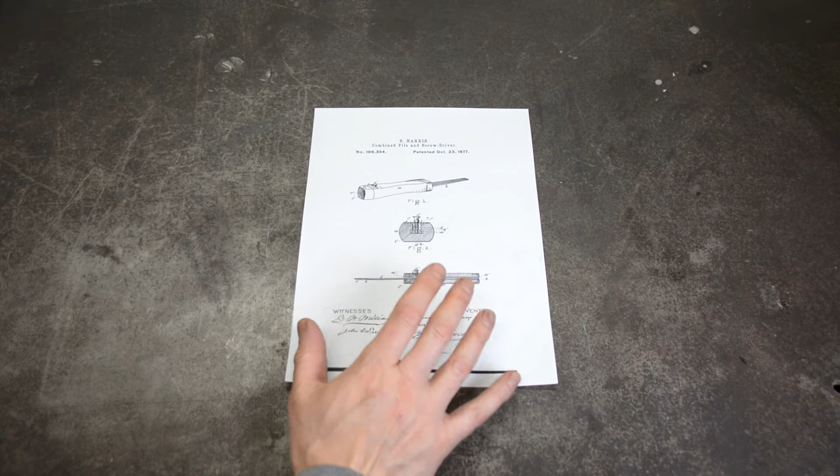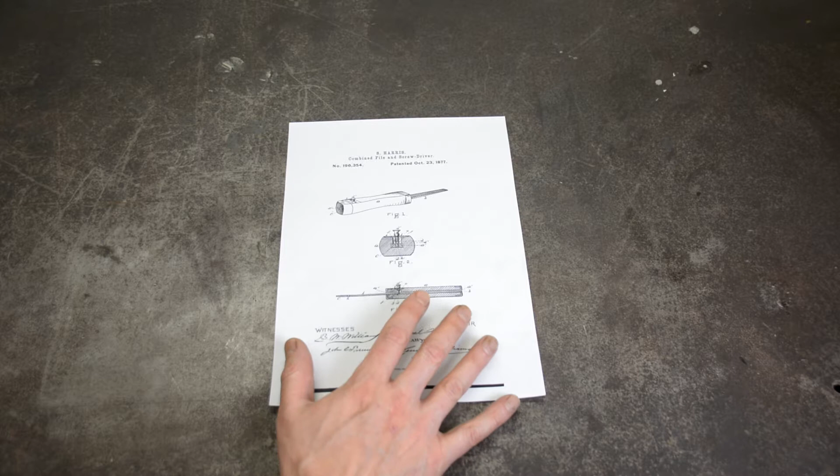Welcome. Here today we have a fabulous multi-tool, patented way back in late 1877 by one Samuel Harris of Boston. The patent, both in the technical drawings and the description, describes a combination file and flathead screwdriver for all of those occasions when you need both of those tools.

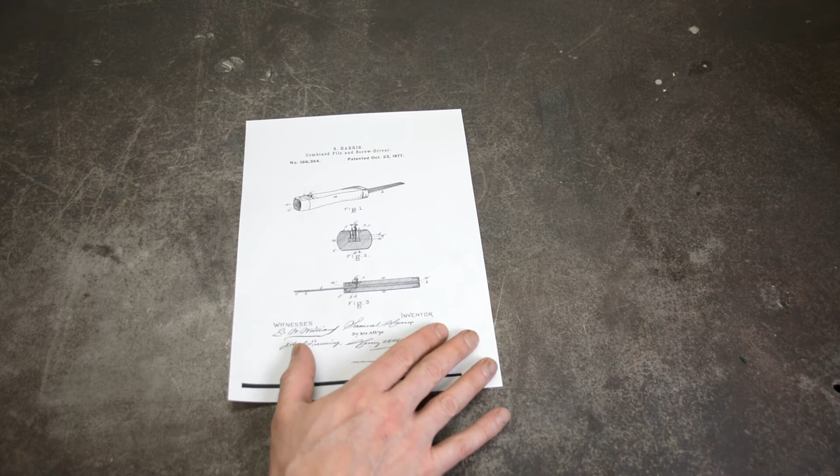Just an incredible example of ingenuity from nearly 150 years ago. I mean, you could only hope to find something like this these days on the Home Shopping Network or something like that. And shockingly, there is no record of this design going into production. Sure, it's a timing thing. It's just too ahead of its time. I'm sure Harbor Freight or something are ready to drop a knockoff of this thing any day now.

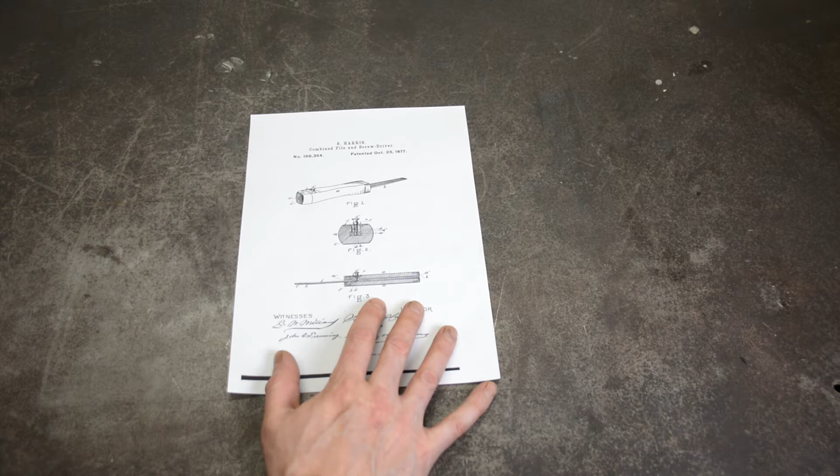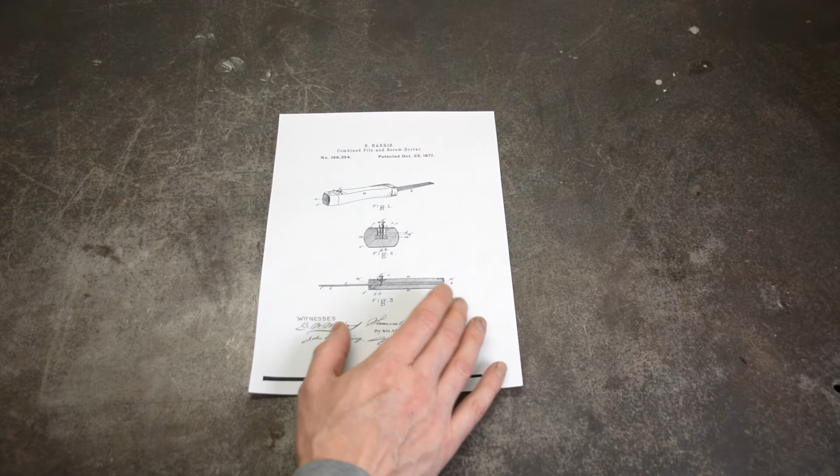In Figure 1 here, we can see the file in position. Figure 2, a locking mechanism, nice and spring-loaded there. And of course, down here we can see the tool runs the entire length of the handle. I really love these multi-tools. You just can't get enough of them. I mean, who could be expected to carry both a file and a screwdriver? So, without further ado, let's see if I can make it.

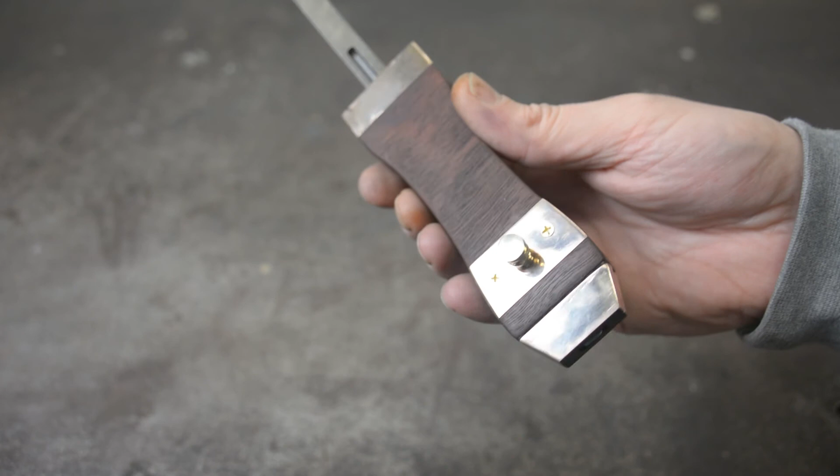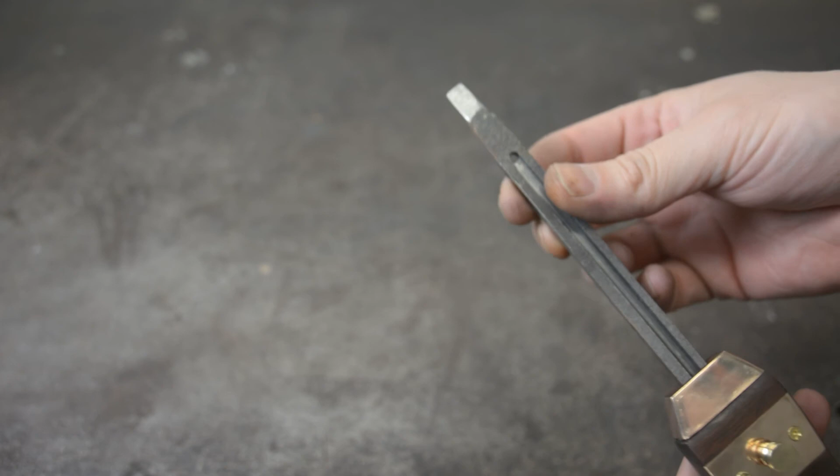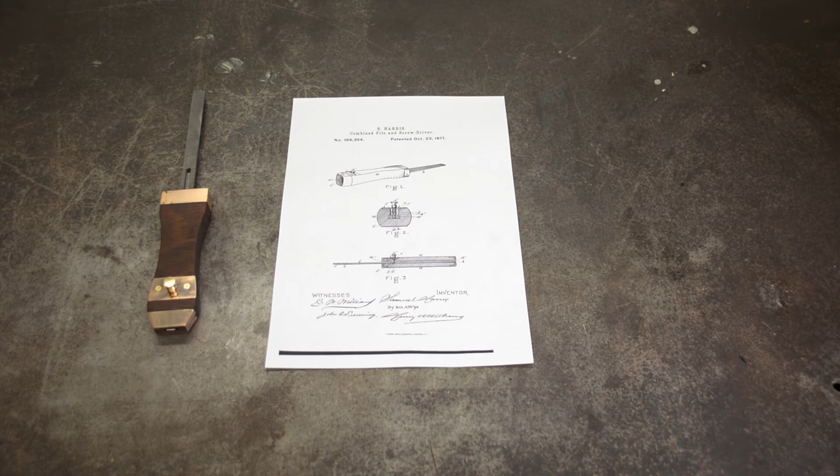Well, that was fun. So what did we learn? Other than I'm not very good at working with copper. Sanded through a few spots here and there. Why might this tool not have seen any kind of production outside the design stage? Well, for one, there's some fairly costly elements to this tool.

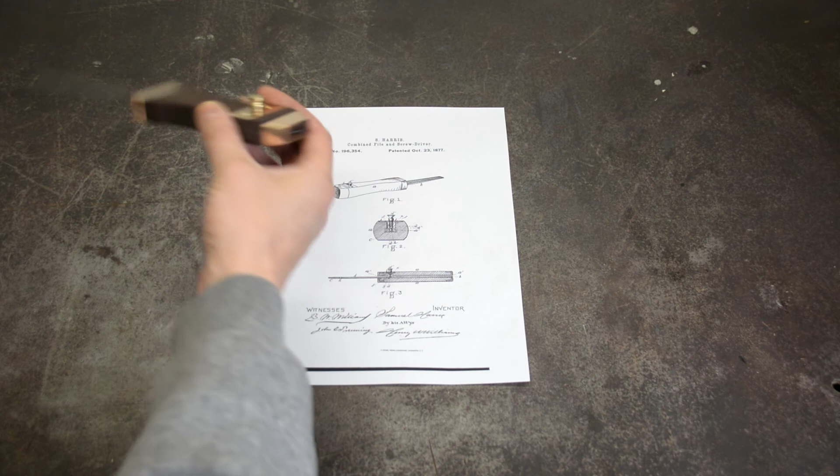The main channel through the handle here. The way I did it, splitting the wood, routing the channel and gluing it back together, not necessarily the best course of action, particularly for a tool that's going to be used in any kind of twisting fashion, like with the screwdriver. For a production tool, you'd probably want to be drilling that out, doing some kind of broaching, a whole bunch of custom jigging, I'd imagine.

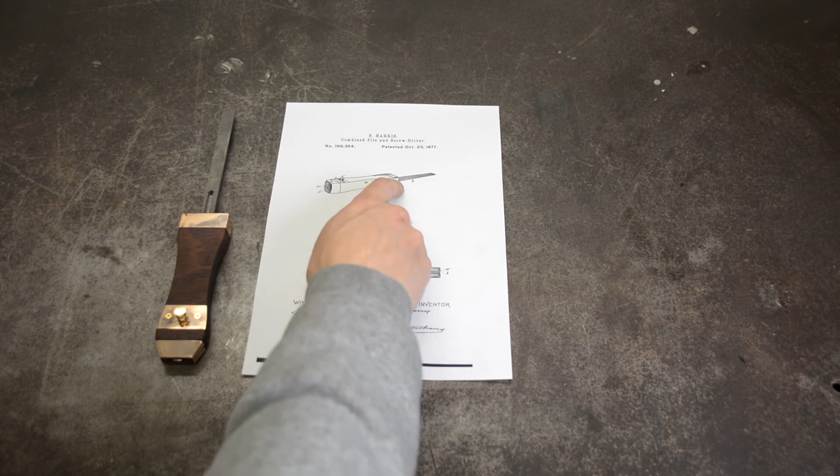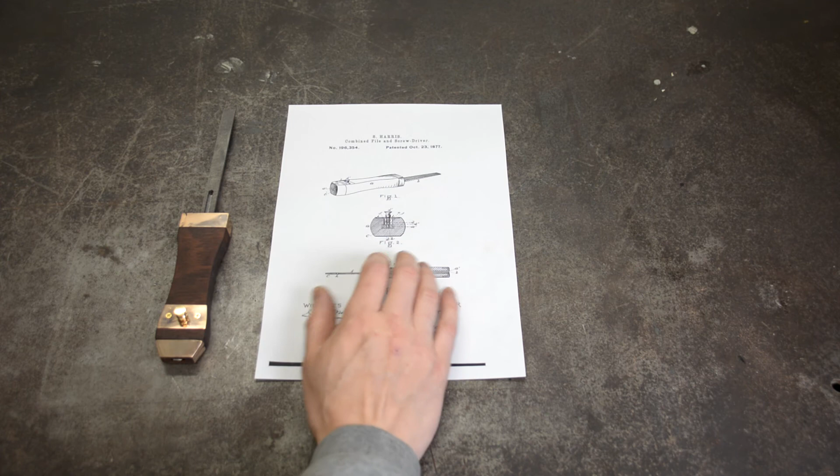The ferrules on each end being weird shapes, that's not great. Particularly this guy on the end with all the curves, the flats, the angles. You're probably going to be looking at a bunch of stamping to produce those, maybe even progressive stamping to get the depth. Again, just adding to the cost of this thing.

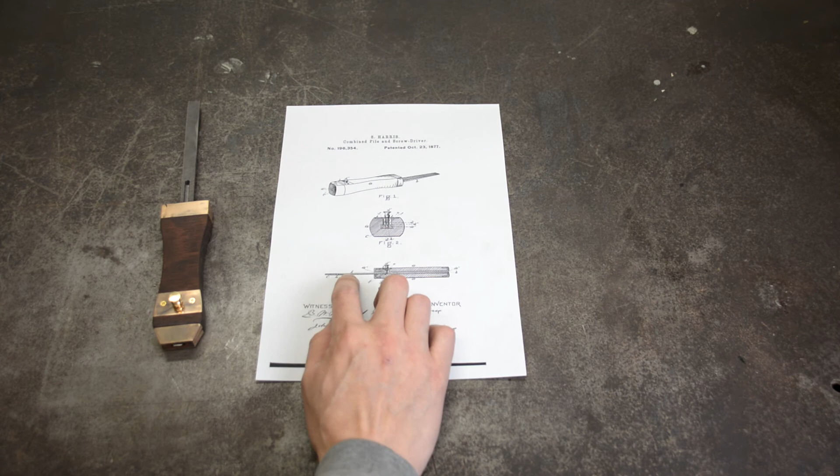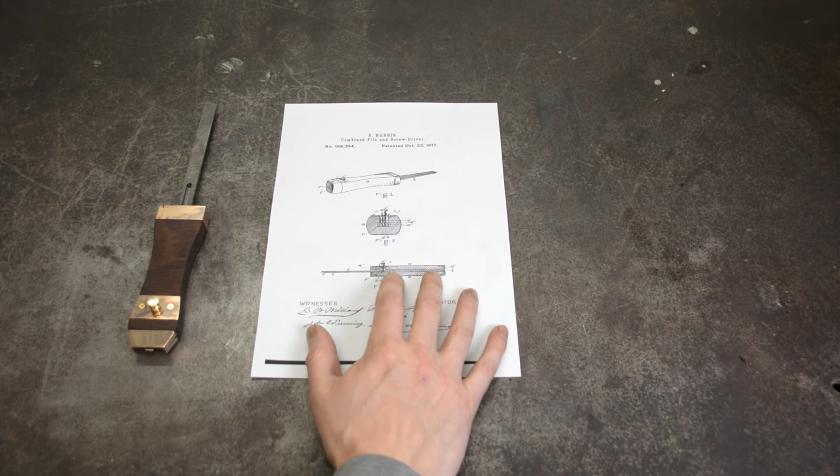As you can see, I did a slightly different design so I could fold it, or at least attempt to fold it. The channel that's in the tool itself is actually described in the patent. Now that's a great bit of design. What that does is that the pin never leaves the channel. It's a retention mechanism. So it means that when you lift the pin and slide the handle, even if you're holding it up, it's not going to fall back out of the tool. That's tool ergonomics from 150 years ago. That's pretty impressive. It's great stuff.

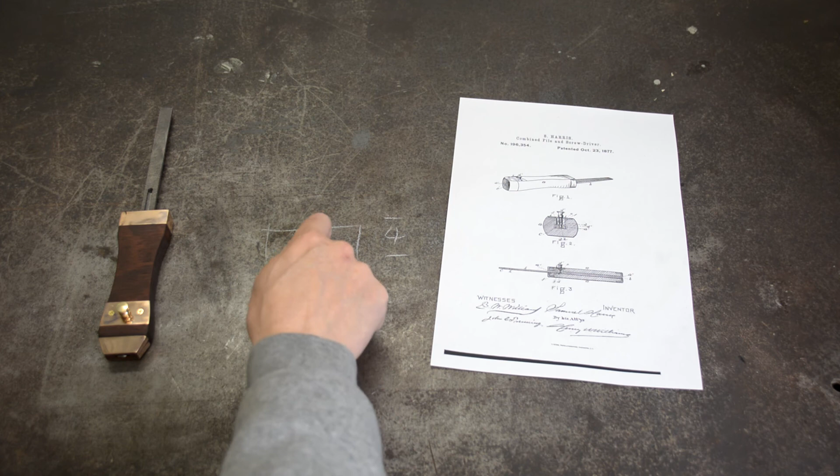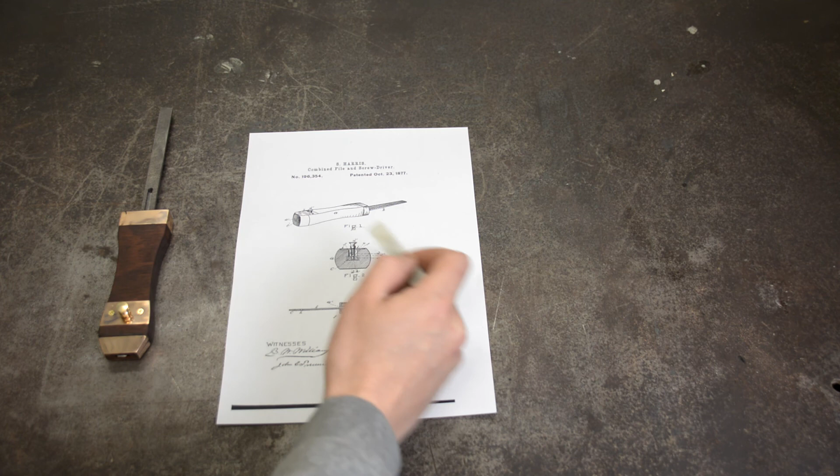Unfortunately, with these dimensions that we're working with, this blade here is I think about 4 millimeters. If we've got a 4mm blade, and the channel runs half that depth, that's about 2 millimeters of max travel. That means all these pin shoulders, your spring compression, the bottom of your channel, all need to be within a fairly tight tolerance for this to operate as expected. Wouldn't be a problem these days, but I imagine that could be problematic in the 1800s.

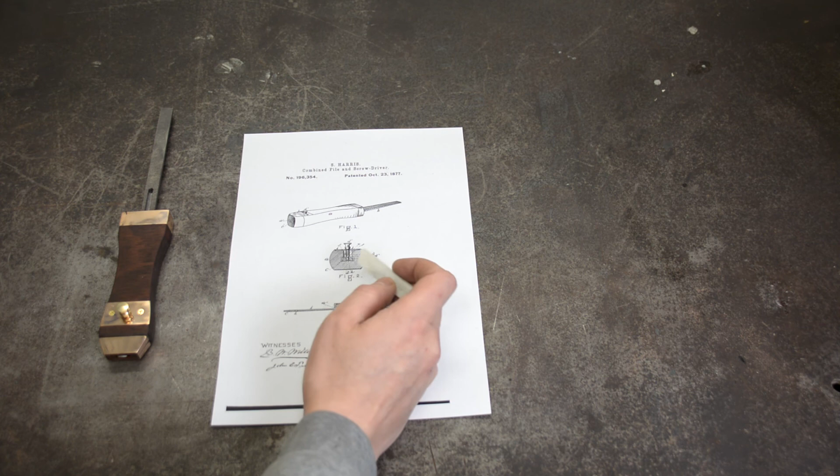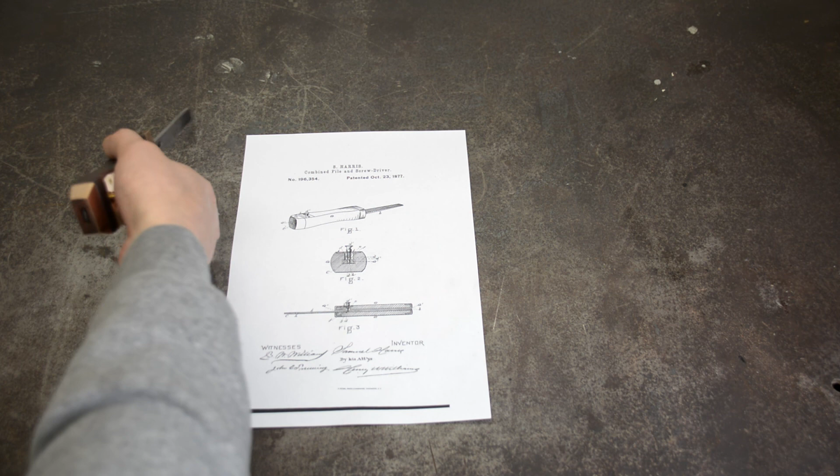And let's not forget, this is a metal file running through a wooden channel. Let that sink in. For a design that relies so heavily on manufactured tolerances, they seem to have glossed over what a metal file does to wood. The lifespan, not so much of the tool itself, but those tolerances wholly depend on how good your file is. You manufacture a great file, stick it in, and this thing's going to be wallowed out and flopping all over the place real quick.

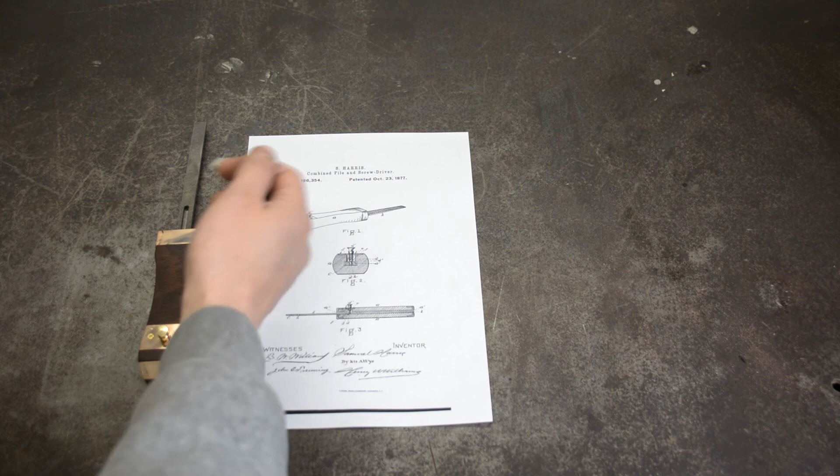Lastly, number one rule of product development: make sure you're filling a need. I can't actually think of a reason for this thing to exist. Perhaps back in the day you needed to touch up all your screws before you drive them into the work, but I don't know, I'm at a loss.

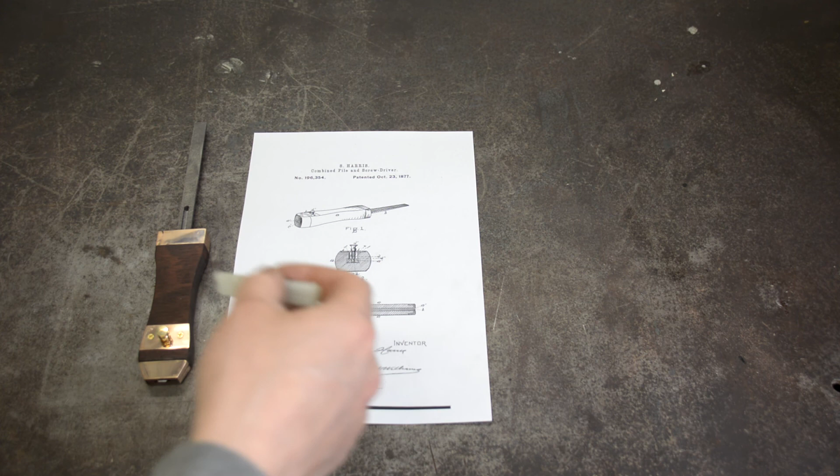In the meantime, I'm going to file this where it belongs, no pun intended.